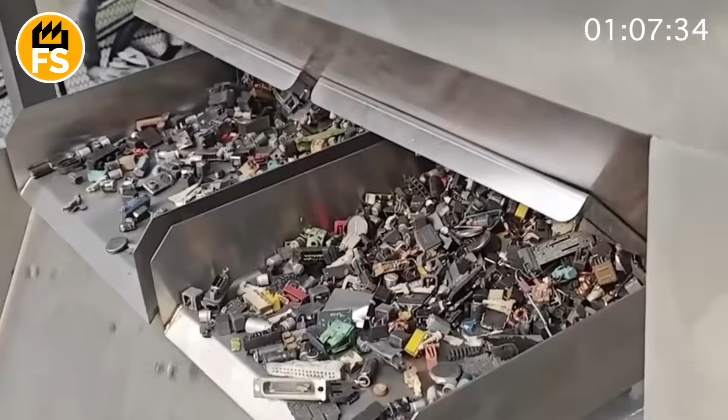But did you know that this trash is now not just a problem, but a goldmine for a new industry? In workshops where just yesterday, dirt and danger reigned, today high-tech hunters are at work. Robots that see more than the human eye and can sort in seconds what humans struggled with for years. And this is just the beginning. If you watch until the end, you'll find out how one teenager's idea changed the fate of the entire ocean.

The waste management sector is undergoing a technological revolution thanks to the implementation of artificial intelligence and robotics. At modern recycling plants, robotic manipulators, controlled by complex algorithms, sort waste with incredible speed and accuracy. Computer vision systems identify different types of materials, such as plastic, glass, paper, and metals, which significantly increases the recycling rate and reduces the amount of trash that ends up in landfills.

On a wide conveyor belt, a continuous, chaotic stream of what we've thrown away. Plastic bottles, crumpled cardboard boxes, aluminum cans, milk cartons, glass bottles. To the human eye, it's just trash, almost impossible to sort through. And for a human worker, it's hard, dirty, and dangerous work. And so, above this stream, like a relentless hunter, it hovers, the sorting robot.

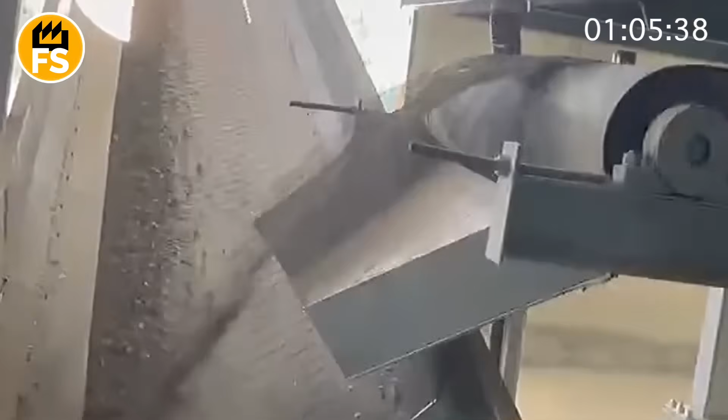This isn't a humanoid android from science fiction movies, but rather a high-tech industrial manipulator, similar to a giant steel arm mounted above the conveyor. But all its magic is inside. Its eyes are not just cameras. They are complex multispectral sensors that see the world differently than we do. They can distinguish materials by how they reflect light, analyze their chemical structure, and shape in a fraction of a second. The heart and brain of the system is artificial intelligence.

Before getting on the job, this AI underwent intensive training. It was shown millions of images of different types of waste, just like you would show a child a million photos of apples until they learned to recognize them flawlessly. In the same way, the robot learned to identify PET plastic, used for beverage bottles, HDPE, a denser plastic for canisters and bottles, paper, cardboard, various types of metals, and glass.

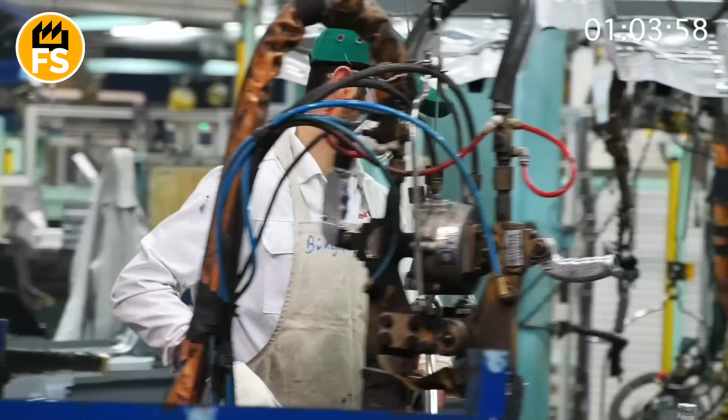And so the action begins. The conveyor is moving. The camera continuously scans the stream. The AI analyzes the images in real time. Target identified: aluminum can. It sends a signal, and the steel manipulator makes a lightning-fast, almost imperceptible move. A pneumatic suction cup, or a mechanical gripper, gently but firmly grabs the can, lifts it above the stream, and with a precise movement, drops it into the corresponding container on the side. Before the can has even landed, the robot's eye has already spotted a water bottle, and the arm flies to a new target.

Speed? A human can't compare. Some models can perform 100 manipulations per minute, that's more than 1 grab per second. Accuracy: the robot doesn't get tired, doesn't get distracted, and doesn't make mistakes due to inattention. Its sorting efficiency reaches over 95%, which significantly improves the quality of secondary raw materials. It can work around the clock, stopping only for maintenance. This isn't just a replacement for manual labor. It's a quantum leap that makes recycling much more efficient and economically viable, turning the problem of trash into a real resource for a new industry.

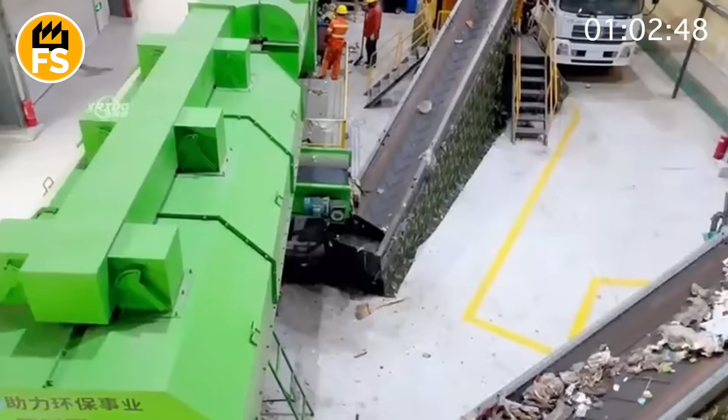The sorted materials, piles of hard plastic, bulky metal structures, wooden pallets, lie in separate mountains. They have been sorted, but are still too large, too awkward to be given a new life. This is where the true heavyweight of the recycling industry comes onto the scene, a machine whose job is controlled, brutal force. This is a rotary shredder.

Externally, it looks like a huge steel box, but its heart is a massive heavy rotor, studded with rows of extremely strong, hardened steel teeth or hammers. This is not just a machine. It's an insatiable beast, powered by a powerful motor that provides colossal torque. Its task is simple, but critically important: to shred.

When material is fed into its huge maw by a conveyor or a manipulator, be it an old car bumper or a whole pile of plastic barrels, a spectacle of unstoppable power begins. As it rotates, the rotor's teeth grab the objects, pull them inside, and with a deafening roar and grinding, tear them into pieces. There's no room for delicacy here. Hard plastic cracks, metal bends and tears, wood turns into splinters. This process is a demonstration of pure physical force, aimed at one goal: size reduction.

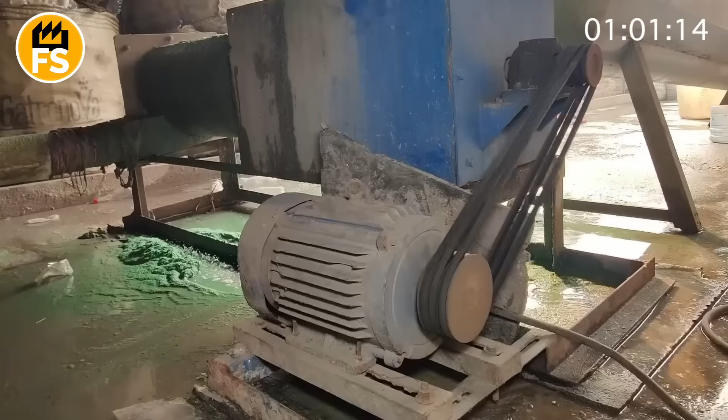But why this destruction? It's not senseless annihilation, but a key preparatory stage. First, the shredded materials become uniform in size, making them much more convenient for transportation and further processing. Second, it's a process of liberation. The shredder breaks down complex objects into simpler components, making it easier to separate different materials from each other in subsequent stages. And most importantly, it creates the ideal raw material for further recycling. A pile of small plastic pieces is much easier to melt in a granulator than whole bumpers.

Huge accumulations of plastic in the world's oceans, such as the Great Pacific Garbage Patch, are one of the most acute environmental problems of our time. By the way, do you believe that this patch doesn't exist? However, thanks to bold engineering solutions, there is hope for cleaning up the marine spaces.

The problem is so gigantic that it seems unsolvable. How can you clean up something the size of several countries? Most people just threw up their hands, but not Dutch teenager Boyan Slat. In his mind, a bold yet brilliantly simple idea was born, which grew into one of the most ambitious environmental projects of our time: the ocean cleanup.

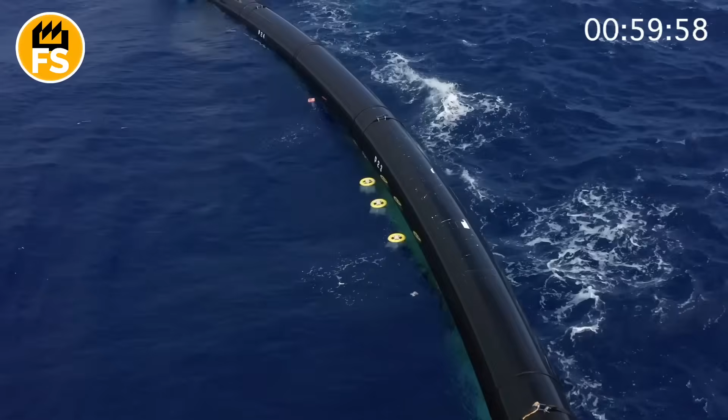The principle of the project is not to chase plastic all over the ocean, but to make the ocean itself deliver the garbage to a trap. For this, giant U-shaped barriers were created. This is not just a net, but a complex engineering structure consisting of a long, floating boom on the surface that prevents plastic from floating over it, and a deep mesh skirt underwater that traps the garbage, but allows marine life to swim freely underneath.

The most interesting thing is how this system moves. It has no engines. It passively drifts, carried by the same forces that move the plastic: wind, waves, and ocean currents. But thanks to its design and a large sail above the water, the system moves slightly faster than the plastic passively drifting in the water. This creates a small but constant difference in speed. The barrier, like a giant shepherd, slowly but relentlessly gathers its plastic flock inside its U-shaped arch.

The path to success was not easy. The first prototypes broke under the pressure of ocean storms, and unforeseen engineering problems arose. But after a series of trials, errors, and significant improvements, the system began to work effectively.

Now, from time to time, special support vessels approach the filled barrier and, like giant garbage trucks, unload the collected tons of plastic. This plastic, from old fishing nets to tiny fragments, is brought to shore, where it is sorted and sent for recycling, closing the loop. Thus, an idea born in the mind of a young dreamer has turned into a real, working technology that offers hope for cleaning our oceans.

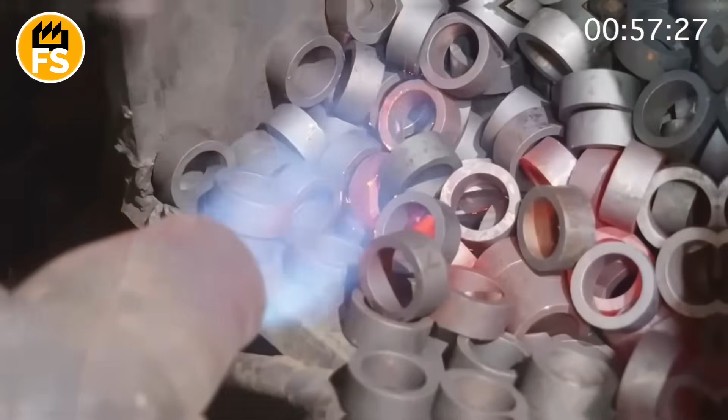Every minute in the United States, over 1,000 feet of copper pipe is manufactured. But behind this seemingly simple component lies large-scale production, explosive temperatures reaching 2,000 degrees Fahrenheit, and even espionage investigations. From molten lava in furnaces to laser marking under ultraviolet light, each pipe follows a journey straight out of a movie about industrial superheroes.

And did you know that some people are audacious enough to counterfeit copper just by painting its surface? This story is about how real pipes are made and how to distinguish the genuine article from a dangerous fake. Let's dive into a world where every second equals a ton of metal.

It all begins underground, in the copper mines of Arizona or Montana, where hundreds of thousands of tons of copper ore are extracted each year. It's crushed, washed, purified, and the output is shiny granules of pure copper. These granules go into smelting furnaces, where temperatures exceed 2,000 degrees Fahrenheit. Here, the copper transforms into molten lava.

The molten copper is poured into long molds, so-called slabs, or ingots. They resemble thick orange beams, glowing white hot. These ingots are destined to become pipes, but there's still a long way to go. Pure copper in the form of ingots or cathode plates is loaded onto railroad flat cars, trailers, or even ships, and transported to rolling mills or pipe manufacturing plants.

Cathode plates are thick metal sheets, approximately 3.3 feet by 3.3 feet, weighing up to several hundred pounds each. At the plant, the ingots or cathodes might first undergo additional remelting to achieve the required purity or desired shape, for instance, round billets for pipes. Then, they are heated and sent to the rolling mills.

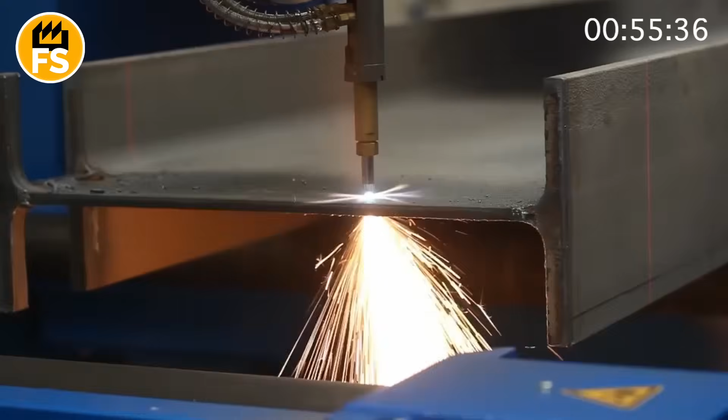Rolling lines operate with machines boasting over 10,000 horsepower. The ingots are sent to rolling stands, machines weighing tens of tons. Giant rollers crush the hot metal, transforming it into long strips. The sight is incredible: the red-hot copper stretches out, sparks fly everywhere, and nearby, streams of water cool the metal, turning it into a shiny, almost mirror-like sheet.

In modern workshops, all of this is controlled by computers. An operator sits in a glass cabin, similar to an airplane cockpit, monitoring dozens of screens. Here, every temperature, pressure, even the sheet thickness is under control. If anything goes wrong, the automation instantly stops the line.

Now for the most interesting part. The copper sheets are cut into blanks. In plants where the copper sheets are still hot after rolling, powerful hydraulic or mechanical shears are used for cutting. They look like giant guillotines with massive steel blades. The sheet moves along a conveyor. An automatic sensor determines the exact cutting spot. The blades descend with immense force and slice off pieces of the required length and width.

What do I mean when I say, with immense force? Sometimes it's tens of tons of pressure. All this happens in seconds, often while the sheet is still moving. That is, the line doesn't stop, and the guillotine cuts on the fly.

For certain formats or thinner sheets, rotary knives are used. These are rotating steel discs that cut the copper as the sheet moves. It looks a bit like cutting pizza, only on an industrial scale. This method is suitable for narrow strips, or when the sheet needs to be cut not only crosswise but also lengthwise.

In modern factories, laser or plasma cutters are used for complex shapes or high precision. A laser beam or plasma arc heats and vaporizes the copper at the point of contact. This results in a perfectly smooth cut, almost free of burrs. Lasers are used for non-standard parts or when special geometry is required.

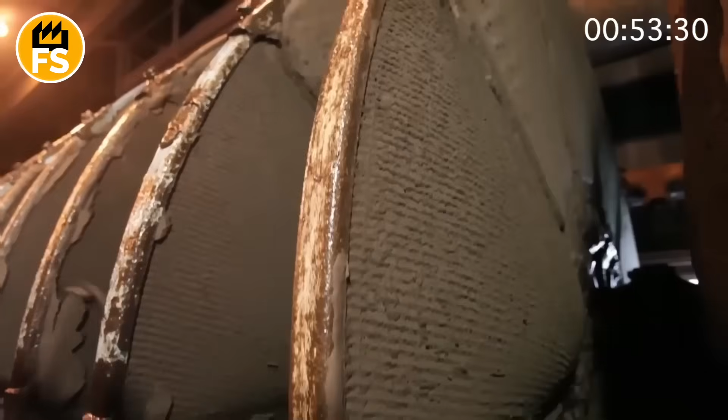After the main cutting, the blanks may pass through special edge trimming machines that remove irregularities, sharp edges, or excess material. The cut blanks are fed into drawing machines. This is a huge press that draws the copper through a steel die. The output is a perfectly round, smooth pipe. All this happens in mere seconds.

The machinery operates at incredible speed. At large plants, like Mueller Industries, they can produce over 1.5 million feet of pipe in a single shift. That's, no lie, like the distance from Chicago to Detroit.

Each pipe undergoes automatic inspection. Laser scanners search for microcracks and defects, and special robots select samples for additional testing.

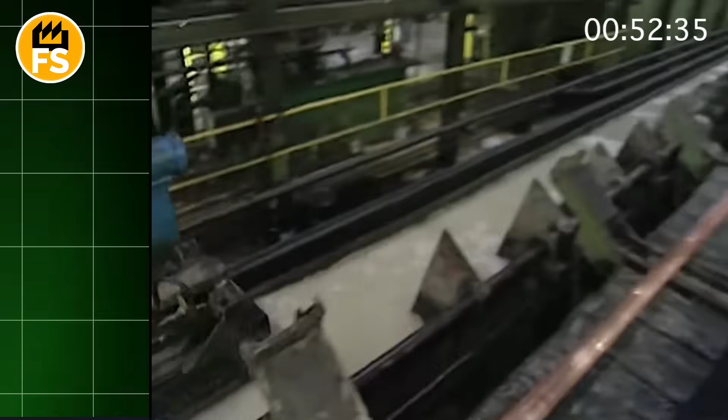After being drawn from the red-hot die, the copper pipe is still hot, flexible, and prone to deformation. To quickly give it stability, the pipes are automatically directed onto a conveyor, leading to special cooling pools. Inside is cold water, which creates clouds of steam upon contact with the incandescent metal. This sharp temperature drop locks the pipe's shape, preventing it from bending or losing its geometry. Cooling takes only a few tens of seconds, but is crucial for quality.

Next, the pipes arrive at the precision cutting table. Here, they are met by automated robots equipped with cutting discs or hydraulic knives. They measure the length with laser sensors and quickly cut the pipe according to the standard, for example 10, 20, or 40 feet, depending on the order. Cutting accuracy reaches tenths of a millimeter, and the speed is up to several hundred pipes per hour.

After this, the pipes undergo quality control. Laser scanners check the external appearance, looking for cracks, burrs, or other defects. Rejected pieces are automatically sent back for remelting.

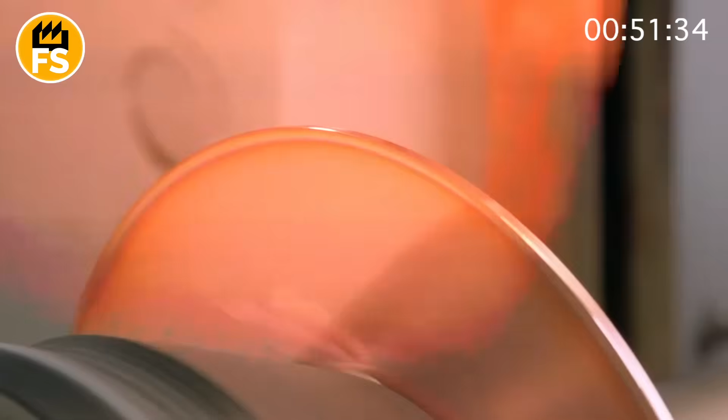Those that pass inspection continue along the conveyor to the marking machines. Here, a laser mark is applied to each pipe. It encodes the production date, batch number, sometimes even a QR code for tracking. This allows for precise identification of each pipe in case of claims or the need for quality analysis.

After marking, the pipes might still be slightly damp from the cooling water. To prevent corrosion and ensure a perfect appearance, they are moved into drying chambers. These are tunnels with powerful fans and heating elements. In just a few minutes, the moisture completely evaporates and the pipes acquire their characteristic copper sheen.

Next comes the packaging stage. Here, robotic manipulators come into play. They pick up the pipes using suction cups or grippers, very carefully stacking them into bundles of 10, 50, or 100 pieces, depending on the diameter and length. The robots work with surgical precision to avoid damaging the pipe surface and prevent deformation.

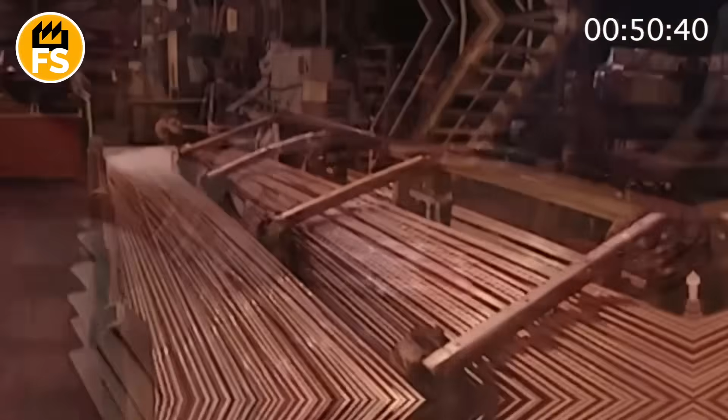After forming, the bundle is secured with metal or plastic straps for reliable fixation. Some plants add protective film or cardboard inserts to prevent scratches during transport.

The finished bundles are automatically moved to warehouse platforms. There, each batch receives a logistics label with all the data about the manufacturer, dimensions, production date, and final recipient. Then, loading onto trucks or railroad flat cars.

Everything happens as quickly as possible. A modern plant can prepare thousands of tons of pipe for shipment in a single day. Thanks to automation, this stage minimizes human involvement, ensures safety and accuracy, and guarantees that the pipes will arrive at the customer in impeccable condition.

Oh right, I promised to tell you about the spy games. This is a real detective approach in manufacturing. Due to the high price and constant demand for copper, temptation arose for unscrupulous manufacturers or intermediaries. They started counterfeiting markings and passing off cheaper alloys or even other metals as pure copper. Fraudsters became so brazen that they began forging documents and selling bootleg goods under the guise of reputable brands.

Counterfeits can be dangerous. They often fail under pressure or corrode faster. A rupture in such a pipe can cause accidents, flooding, or fires. Counterfeiting scandals have occurred in many countries when it was discovered that a copper pipe actually contained only a thin layer of copper, with cheap metal inside.

Manufacturers spent years building their reputations, and counterfeits under their name could lead to mass recalls and lawsuits. Therefore, pipes are now marked with invisible inks visible only under ultraviolet light. This helps combat counterfeiting.

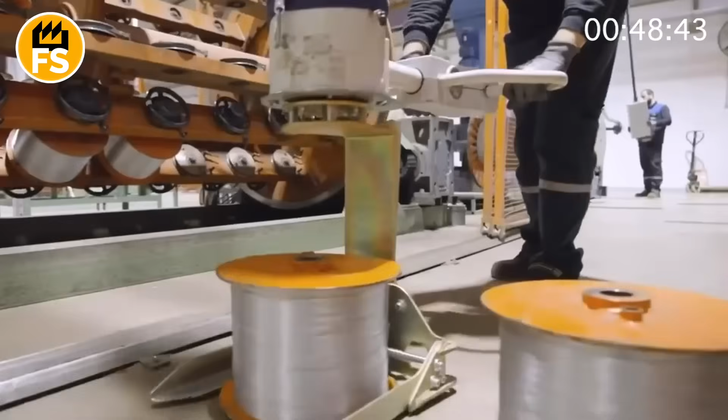Every year, the world produces over 200 million kilometers of cable, enough to wrap around the Earth 5,000 times. But few people know that the heart of every electric car is not just the battery, but also a cable that can withstand voltage, temperature, pressure, bends, and vibration. How are these high-tech wires created, capable of working in conditions where even metal seems alive?

How do scrap, dust, and molten aluminum turn into the arteries of Tesla, Rivian, and Lucid? In this video, the whole truth about the most engineered wire of the 21st century.

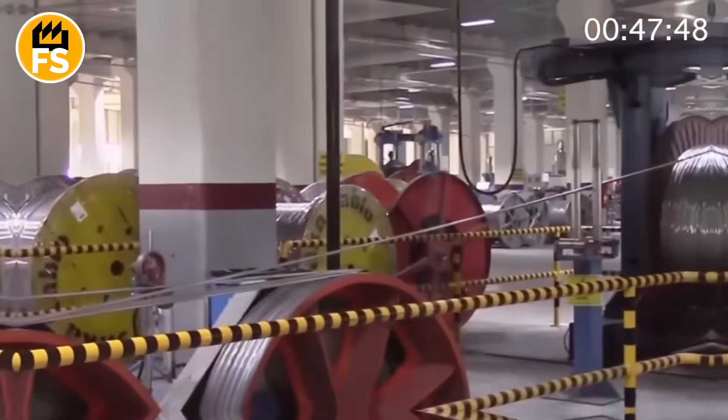Every cable for an electric car is a strategic choice. It must be flexible but not brittle, conductive but not vulnerable, lightweight but capable of withstanding hundreds of amps and thousands of hours of voltage. And when engineers sit down at the drawing board, they are like alchemists of the future, mixing formulas of elements in their heads, searching for the perfect balance.

Copper is the good old classic. It conducts electricity better than anything else, and it's its heart that beats in most cables. But the weight, oh, that weight! An electric car needs to be as light as a cat, so aluminum often steps in as a substitute. It's cheaper and lighter, though not as conductive. But in the right alloy, it's already a weapon of the electric age.

And around it, insulation. These are highly engineered polymers that can withstand heat, cold, chemicals, vibration, dust, and even a small lightning strike under the hood. They lack the shine or weight of metals, but without them, everything would turn into a sparkling inferno.

Some cables have shielding, a thin armor of copper braiding or aluminum foil. It protects signals from interference, because in an electric car, not only kilowatts are important, but every millivolt of data too.

Aluminum isn't born shiny. First, it's rough ingots, each weighing over 1,000 pounds. They arrive at the factory like aliens from their ore world, extracted from bauxite, purified, remelted, and finally formed into rectangular blocks resembling metal sarcophagi.

These ingots arrive in large trailers, carrying tens of thousands of pounds of the future. By appearance, they are just shiny silver blocks, neatly stacked on steel pallets. But just get closer, and you'll feel it. A warmth of energy emanates from them, encapsulated in atoms.

Sometimes, instead of ingots, the factory receives aluminum coils. This is already processed aluminum wire, wound into coils 3 or 4 feet in diameter, each weighing about 500 pounds. They shine like snake coils and glisten in the light, as if they just came out of a cybernetic beehive.

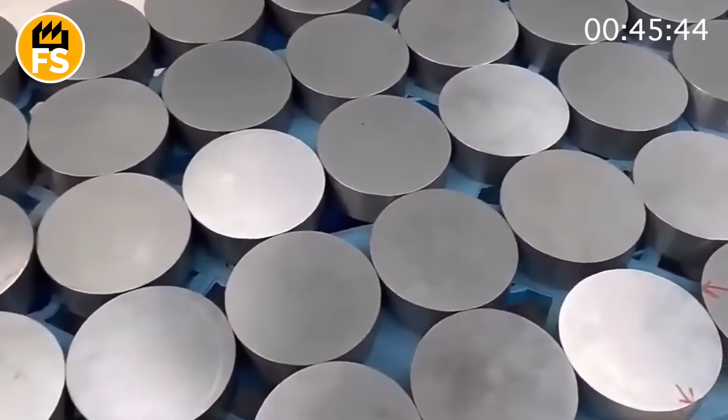Separate batches are supplied as aluminum scrap, meaning leftovers from other productions, cuttings, shavings, fragments of frames. They are sorted, cleaned, remelted, because in this future, not a single crumb of metal goes to waste.

As soon as aluminum enters the factory gates, it is identified, tested, and marked. In the first stage, technicians inspect the ingots or coils, checking for cracks, corrosion, impurities on the surface. It's like a quick checkup, by eye, by hand, with a scanner. If rust, oxidation spots, or transport damage are noticed, the metal is either sent for remelting or rejected.

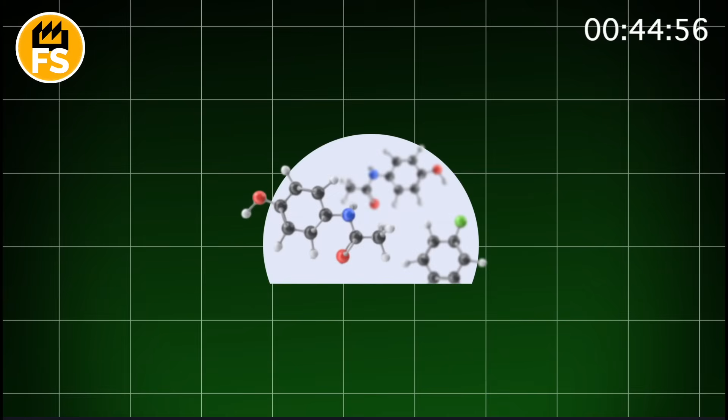Next, chemical expertise. A piece of each ingot is taken and checked on a spectrometer. This device shoots the metal with a laser, captures the reflected waves, and shows how much aluminum, iron, silicon, copper, magnesium, and other elements it contains. The goal is to make sure it's the right grade.

After passing the tests, the ingots are marked with a batch identification number, alloy grade, date and place of melting, and sometimes a QR code that leads to a full technical passport. It's like a birth certificate that will travel with the metal until the moment it becomes wire and ends up inside a Tesla, Rivian, or Lucid.

When the ingots have passed inspection and received their quality mark, they are loaded into giant electric or gas furnaces. The temperature inside, over 1,220 degrees Fahrenheit, is exactly what's needed to turn aluminum into liquid silver. No alchemy. We're talking about molten metal.

The damper opens, and massive cranes carefully lower the ingots into the red-hot interior. The metal slowly melts, releasing a gray vapor and a strange smell, a chemical mixture resembling heated foil and ozone. Nearby, operators in heat-resistant suits looking like astronauts carefully monitor the furnace indicators: temperature, impurity level, viscosity.

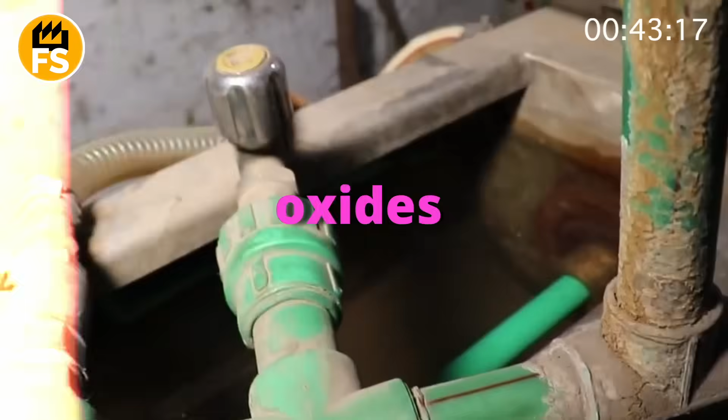No mistakes are allowed here, as the cable for an electric car must withstand thousands of miles and hundreds of charges. A slag layer appears on the surface of the molten metal: impurities, oxides, residues of alkaline metals. It is removed manually, or by automatic systems to leave only a clean, homogeneous mass. Sometimes, modifiers or alloying elements are added to give the metal the desired properties: more conductivity, strength, flexibility.

Molten aluminum is poured into casting molds, usually round blanks 4 to 6 inches in diameter and up to 10 feet long. These are the future rods from which cables will be drawn. The process is called casting billets. Cooling is controlled in stages to avoid cracks. All this is accompanied by hissing steam, the roar of pumps, and a rhythmic thud, the heartbeat of the cable factory.

So what is drawing? It's a process where aluminum rods are pulled through a series of increasingly narrow holes. With each pass, the metal becomes thinner, longer, and stronger. Like a piece of dough being rolled out into noodles, only instead of dough, it's hot aluminum, and instead of a rolling pin, hydraulic machines weighing tens of tons.

Before drawing, the blank is heated to an optimal temperature, no more than 650 degrees Fahrenheit, so it becomes plastic but doesn't melt. Then it's fed into a drawing machine, where the magical transformation begins.

Each pass through the die reduces the wire's diameter by a few percent. It's like passing through increasingly tight doors, forcing the material to stretch. After a dozen such passes, a thick rod half an inch in diameter becomes a slender strand 0.1 inch thick or even less. During drawing, the wire heats up from friction, so it's constantly cooled with water or special lubricants.

Without this, it would overheat, lose its shape, or even break. Lubrication also reduces wear on the tools, dies made of carbide or diamond. Some machines can draw wire at speeds over 2,000 feet per minute. It's like someone pulling a spider web from a ball of lightning.

Engineers carefully monitor the tension, temperature, shape, and shine of the wire, because even the smallest crack or geometry violation is a future short circuit in a $60,000 car.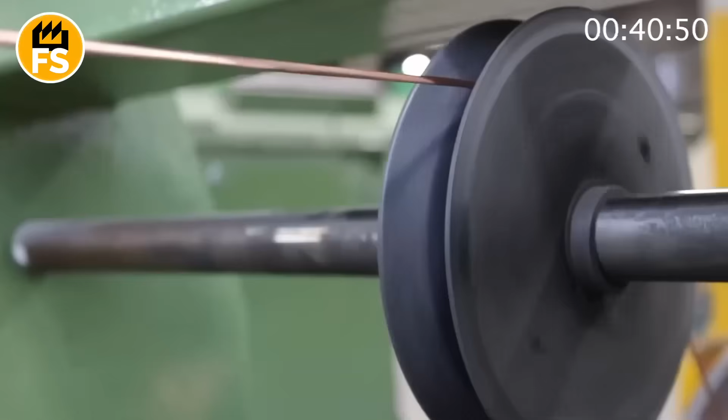When the drawing is complete, the cable thread already looks like a shining string for a future electro-magical harp. It's long, thin, conductive, but still stubborn. To be able to wrap around batteries, penetrate narrow body channels, and withstand hundreds of thousands of bends in the motion of an electric car, it needs to be annealed.

The wire slowly passes through furnaces without an open flame, or through an induction field that heats it from the inside. The temperature, around 600 degrees Fahrenheit. This is the point where the metal doesn't melt, but changes its character.

The atoms, which until now held onto their nodes in a stressed crystal lattice, finally relax. Like soldiers after a battle, like a string that has sounded at its maximum, and finally fallen silent. The metal structure becomes more uniform, the grains larger, and the wire itself flexible, elastic, calm.

The surface of the wire after heat treatment is darkish, with scale or signs of oxidation. It is cleaned off with abrasive brushes or in chemical baths. Aluminum must shine, like a star before a rocket launch. The cleaner the surface, the better the insulation will adhere.

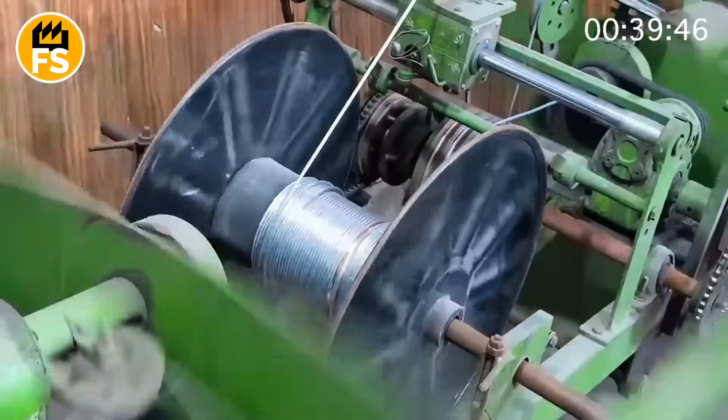Next, insulation. An ultra-thin layer of material is applied to the wire, separating it from everything except the current. This can be polyethylene, Teflon, silicone, or enamel, depending on the cable's intended purpose. The material is applied in liquid form, often in heated baths or through nozzles that cover the wire with a uniform flow. The application temperature, over 400 degrees Fahrenheit.

As soon as it's applied, it's immediately baked. The insulation doesn't dry, it polymerizes. It's like creating a skin around the nervous system. It must be perfectly even, dense, without microcracks. Otherwise, the wire won't pass the test.

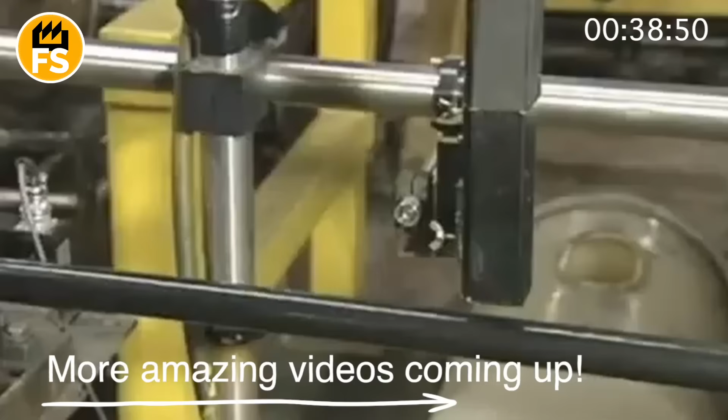Next, the wire passes through detectors that check it for breakdown, coating thickness, and electrical resistance. At least once every 1,000 feet, samples are taken manually and checked under a microscope. Everything is recorded because this wire will later work in high-voltage systems.

The finished wire is cooled, lubricated to reduce friction, and then carefully wound onto drums or spools, sometimes up to 5,000 feet long. This is no longer just metal. It's the nerve of an electric car, ready to hit the road.

Did you know that each year the world builds structures so massive, skyscrapers scraping the sky, bridges spanning vast canyons, ships larger than city blocks, that they require metal parts shaped with forces equivalent to thousands of tons and precision measured in mere millimeters? This isn't just cutting and welding metal in a workshop. This is bending steel plates thicker than your arm, forging colossal parts under unimaginable pressure, and machining giant structures with surgical accuracy. Get ready to witness the most impressive, largest-scale metal fabrication methods on Earth, uncovering the hidden power and precision that builds our modern world.

The sheer scale of metal fabrication hits you right away on the factory floor. We're talking about moving and shaping pieces that weigh tons. One of the most fundamental and visually impressive processes is metal bending. Forget bending a paperclip. Imagine bending steel beams strong enough to support a building, or curving thick metal plates for ships and pressure vessels.

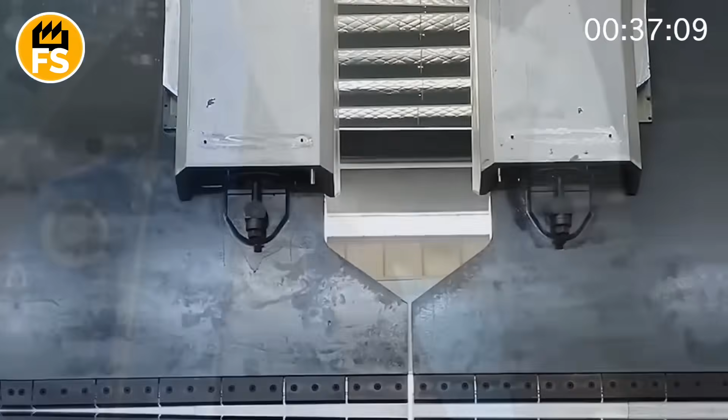Massive machines called press brakes or roll benders use incredible hydraulic force to shape metal. Picture a giant press pushing down with thousands of tons of pressure to put a precise bend in a steel beam, or colossal rollers curving a thick steel plate into a perfect cylinder. These aren't just big tools. They're feats of engineering designed to apply immense force with fine control.

On the biggest scale, you see specialized machines like the FKB 3-roll plate bending machine, capable of shaping massive steel plates for tanks, wind turbines, or ship hulls with incredible accuracy. Software like Bentronic controls the rollers with millimeter precision, even on pieces the size of a room.

Another impressive example is bending giant steel beams for structures. Machines like the Faccin RCMI use powerful hydraulic rolls and guide systems to curve huge I-beams or H-beams into exact shapes needed for complex architecture or bridges. Applying that much force while maintaining the beam's structural integrity is a true industrial art form, making metal flow like clay, but under thousands of tons of pressure.

Another mind-blowing method is metal forging. This is using localized compressive forces, often with immense power and heat, to shape metal. Think of a blacksmith, but on a scale where the hammer is a machine delivering thousands of tons of force. In massive forging presses, heated metal billets, solid blocks of steel, are pounded or squeezed into complex shapes. This process changes the metal's grain structure, making the finished part incredibly strong and durable. This is how critical components for aircraft landing gear, engine parts, or even massive artillery barrels are made.

At places like the Watervliet Arsenal, you see iconic machines like the rotary forge. This is a different kind of forging, using rotating dies to hammer and shape a heated steel billet into a hollow tube, like a cannon barrel, with incredible speed and precision. These machines have been operating for decades, playing a vital role in producing thousands of heavy-duty barrels for military systems. The sheer force and rhythmic pounding of these colossal machines working on red-hot metal is one of the most dramatic spectacles in metal fabrication, showcasing raw power precisely controlled.

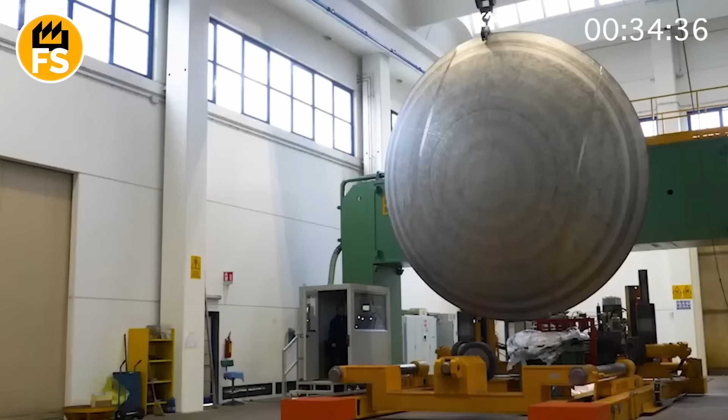Once metal parts are formed by bending or forging, they often need precision finishing. This is where machining comes in, using tools to cut away material and achieve exact dimensions and shapes. On the biggest scale, this involves massive CNC, computer numerical control, machining centers working on parts that weigh many tons. Imagine a machine tool the size of a small house, precisely cutting, drilling, or milling a giant metal casting or forging with micron-level accuracy. Sophisticated software controls these machines, making complex cuts and achieving tolerances required for critical components in aerospace, heavy machinery, or energy production.

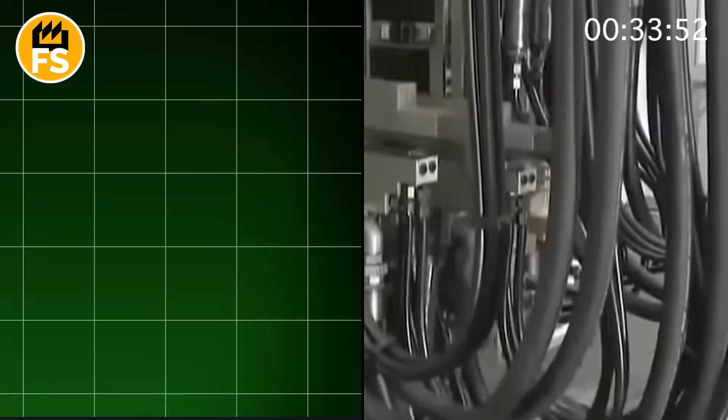Precision machining isn't just about size, it's about achieving incredible accuracy on massive objects. Machines use advanced cutting tools made of hardened materials, sometimes cooled with high-pressure coolant, to cut through tough alloys. On critical components like gearbox housings, turbine shafts, or large crane parts, surfaces must be machined to tolerances that ensure perfect fit and smooth operation under immense loads for decades. It's a process where technology allows engineers to sculpt giants with the precision of a jeweler.

Beyond these core methods, metal fabrication involves a host of other impressive processes on industrial lines. Cutting is a crucial first step, using powerful lasers, plasma torches, or water jets to slice through thick metal plates with incredible speed and clean edges. Welding is joining metal pieces together, from automated robotic welding arms building vehicle frames or ship sections, to skilled human welders performing critical structural welds that must withstand massive forces. Surface treatment like sandblasting and industrial painting or coating lines protect the metal from corrosion and give it its final look.

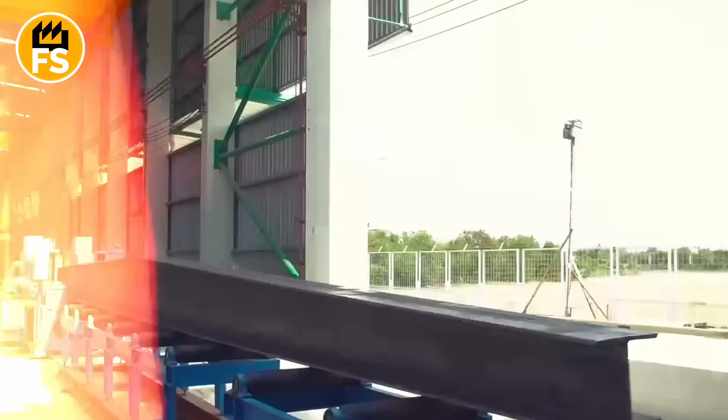Throughout all these stages, from the arrival of raw metal plates and beams to the final finished and assembled components, rigorous quality control is paramount. Industrial scanners, ultrasonic testing, X-rays, and precise measurement systems check every weld, every dimension, every material property. Experienced technicians and engineers oversee automated inspection systems and perform manual checks on critical points. A blend of high-tech monitoring and human expertise ensures these massive metal parts meet the highest standards of strength, precision, and safety required to build skyscrapers, planes, and infrastructure.

These massive metal fabrication facilities are not just factories. They are cathedrals of engineering power and precision. They process hundreds of thousands of tons of metal each year, shaping it into the backbone of our cities, transportation, and industries. It's a testament to human ingenuity and technological advancement, taking raw materials and applying immense force and incredible accuracy to build the physical world around us. It's a hidden, necessary industry that few people ever see.

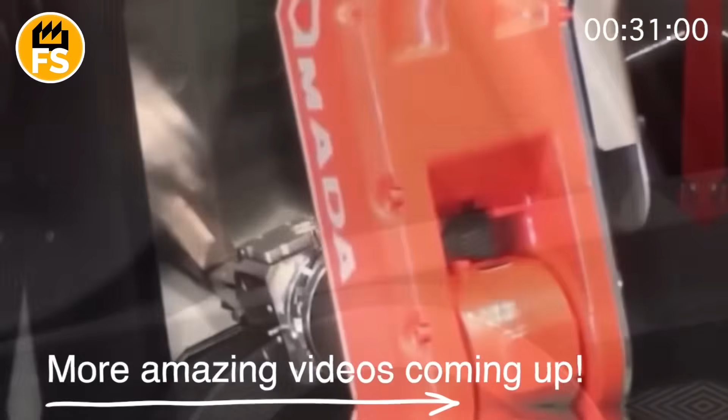So, the next time you look up at a skyscraper, cross a bridge, or see a large machine at work, remember the mind-blowing industrial process that created its metal bones. The bending of giant beams, the forging of colossal parts, the precision machining of massive structures. It's all part of the amazing world of metal fabrication. It's a fascinating look into the power and precision that builds our modern world.

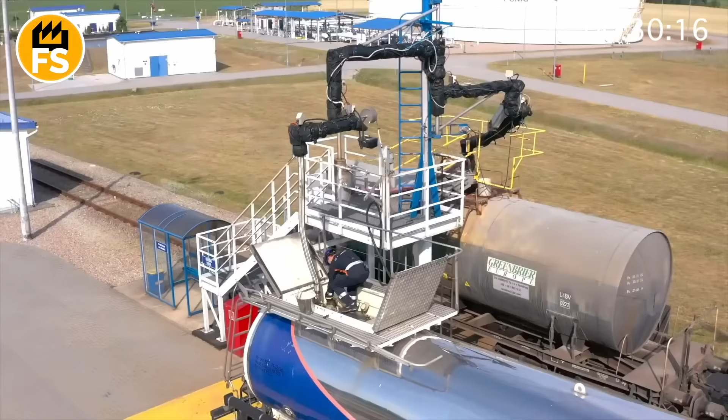Today, we're gonna dive deep into the seriously fascinating world of oil production. We'll start with how it even forms over millions of years, then check out the incredible tech in modern wells that punch down tens of thousands of feet into the earth. We'll cover everything from those giant platforms way out in the middle of the ocean to the complex refining steps that take that raw material and turn it into clean fuel. Ready to find out the real story behind that black gold? Let's just jump in and see how it really works.

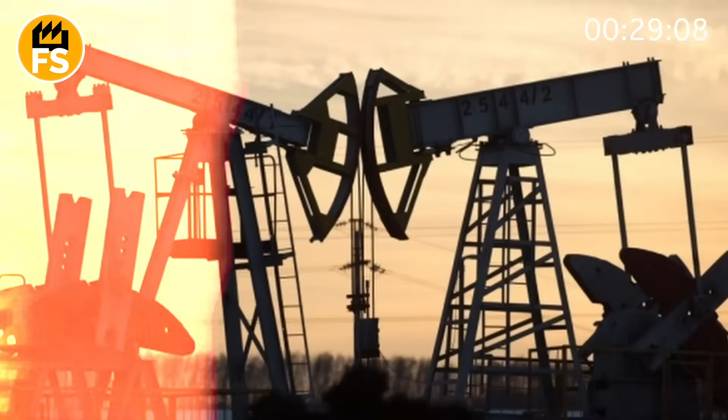Folks are projecting that average oil production in the United States next year is going to hit right around 9,900,000 barrels per day. But honestly, do you even know what oil is or where it came from in the first place? Everybody talks about oil this, oil that, oil spills, oil production, but nobody ever really tells you what it actually is. Well, stick with us and we'll break it down for you.

The way oil forms is a seriously long-term project, taking millions of years. It kicks off with organic stuff, like the leftovers from ancient plants and little critters, piling up on the bottom of old seas and lakes. Over time, these plant and animal remains get buried under layers of sedimentary rocks, things like clay and sand. Then, under a ton of pressure and heat, which gets way more intense the deeper you go, that organic material starts transforming into something called kerogen, a kind of solid, waxy material. If the temperature keeps cranking up, hitting somewhere between 140 and 302 degrees Fahrenheit, that kerogen breaks down using heat, and you end up with liquid hydrocarbons. So, yeah, that's your oil.

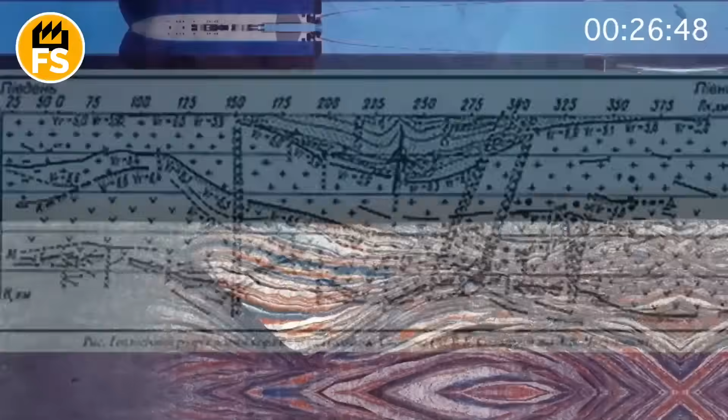Seismic surveying is actually pretty spectacular to witness. They set off controlled underground explosions in a specific area, or use special vibrating platforms to create waves that travel down through the rock layers. These waves bounce off different layers in the ground and come back up, and sensors pick them up. It's like building a three-dimensional picture of what's underground, essentially letting them see beneath the surface.

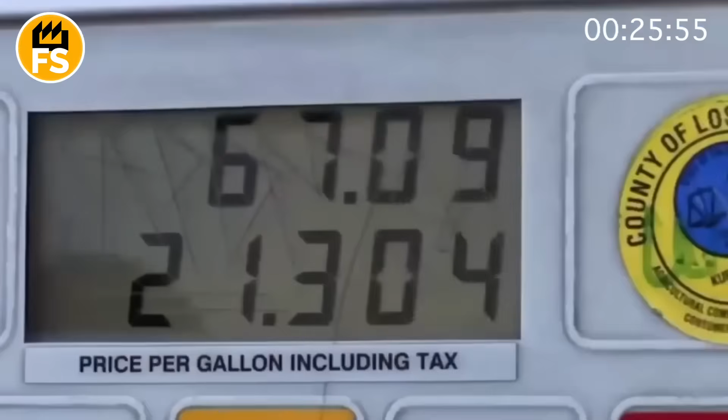Once the geologists pinpoint a promising spot, the actual drilling kicks off. A rig, whether it's sitting on land or floating out in the ocean, turns into this giant humming machine that runs non-stop 24/7. The drill string, those are steel pipes with a cutting bit on the end, bores into the earth, spinning at up to 200 rotations per minute. To keep the drill bit cool, carry rock pieces out, and stop the hole from collapsing, they pump in drilling mud. That's a thick mixture, usually water or oil-based.

Modern wells can go seriously deep, ranging from 10,000 feet down to 16,000 feet. And sometimes, way deeper, up to 35,000 or even 40,000 feet. For instance, over in places like Texas or Saudi Arabia, they're drilling wells that stretch over 26,000 feet long. And often, a big section of the well goes sideways, horizontally. This lets them tap into a much bigger chunk of the oil reservoir without having to drill a bunch more vertical wells.

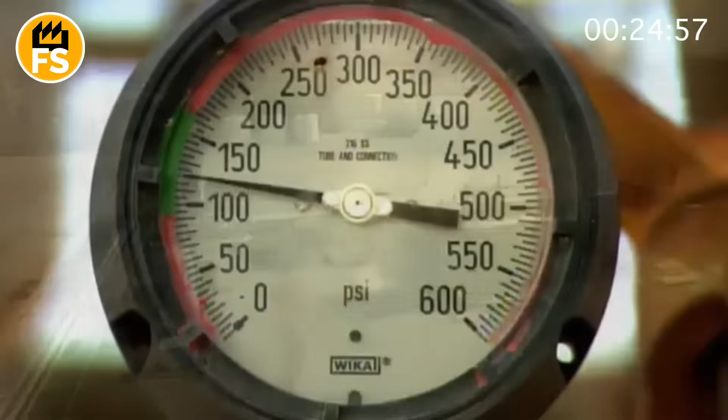One of these operations can cost you anywhere from a few million dollars to easily tens of millions of dollars. And honestly, it doesn't always work out successfully. But if the well does turn out to be a producer, oil starts making its way to the surface, either pushed by its own natural pressure or pulled up with pumps. And that's when the next big stage begins, actually getting the oil out, processing it, and shipping it off.

Speaking of major producers, Saudi Arabia is right up there as one of the biggest oil producers globally. Just back in February, Saudi Arabia was pumping out nearly 9 million barrels of oil every single day. This country actually has a solid chance to boost its standing in the energy market even further, especially since Saudi Aramco recently announced they found 14 brand new oil and gas fields right there in the country.

So, once all the exploration and well drilling is completely finished, the absolutely crucial stage begins, actually pulling that oil out of the ground.

If the field is really rich, the oil itself might just start pushing its way up to the surface simply from its own pressure. That's what's traditionally called a gusher. And while it might look pretty dramatic, with those big streams of black liquid shooting up into the air, these days, that method is seen as pretty old school and kind of dangerous. Modern wells are outfitted with sophisticated systems of valves and regulators that allow them to precisely control the pressure and the volume of oil that's flowing out.

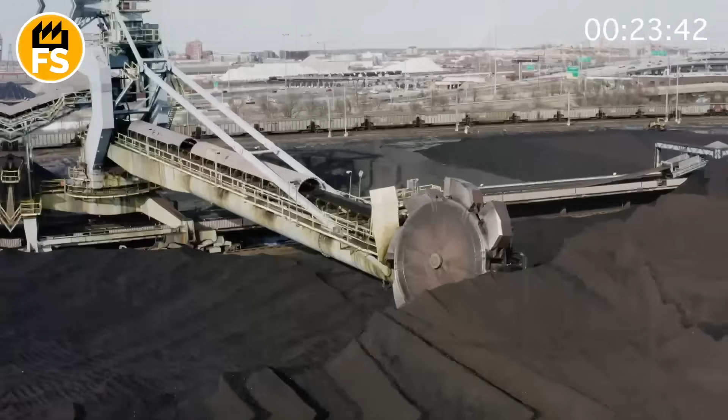The oil gets to the surface through a network of pipes, and then it heads over to what's known as a processing facility. That's where they separate it from other stuff that came up with it, like associated gas, water, sand, and whatever else is mixed in. This step often happens right there at the extraction site, either on those big platforms out in the ocean or at bases on land. Separating all those impurities is a pretty cool process to watch.

The oil mixed with all the extra stuff goes into this large, sealed tank, and gravity gets to work inside. Gas is light, so it floats up to the top. They collect it through an upper outlet. Water is heavy, so it settles down to the bottom. They drain it off through a lower valve. Oil is in the middle in terms of density, so it hangs out between those two layers.

Now, if tiny droplets of water get kind of stuck in the oil, it's not quite as simple to separate them out. That's when they might add something called demulsifiers. These are chemicals that break up that mixture. Or they might heat the oil up a bit, which also helps those different layers split apart. But hey, let's get back to the extraction itself.

Sometimes, to increase the pressure down in the rock formation, they use secondary recovery methods. For instance, they might pump water, gas, or even steam into other wells. This helps push the oil towards the well they're actually producing from. Technologies like this can help them pull out up to 60% of the oil reserves from a field, whereas without them, that number could be cut in half.

The average amount of oil a modern well in the United States produces is anywhere from 500 to 1,500 barrels per day. Just think about that for a second. One barrel is 42 gallons. Now multiply that by the thousands of wells operating all over the planet, and that really gives you a sense of the true scale of oil extraction.

Oil by itself is actually a really complex blend of hundreds of different hydrocarbons, ranging from lighter gases all the way up to heavy fuel oils. To get gasoline out of it, that's the light, easily ignitable part that internal combustion engines can use effectively. The raw material goes through several technically tricky stages at an oil refinery.

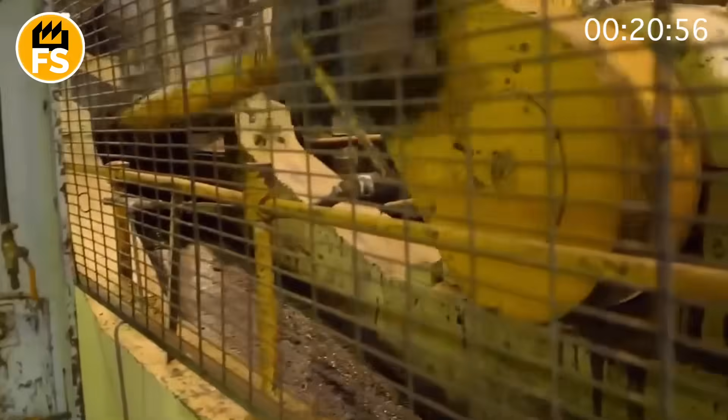It all kicks off with something called fractional distillation. Crude oil is first heated up to temperatures between 660 and 750 degrees Fahrenheit and then fed into a distillation column. This is a tall tower where the temperature gets cooler as you go up. Different components of the oil vaporize and rise to different heights, where they cool down, turn back into liquid, and are collected at various points.

The gasoline part, one of the lighter ones, is typically collected at levels corresponding to temperatures between 104 and 392 degrees Fahrenheit. But simply distilling the crude oil isn't quite enough to get high-quality gasoline. You only get about 15 or 20% of the gasoline fraction this way, and most of what comes out still has stuff you don't want in it, and an octane number that's just too low.

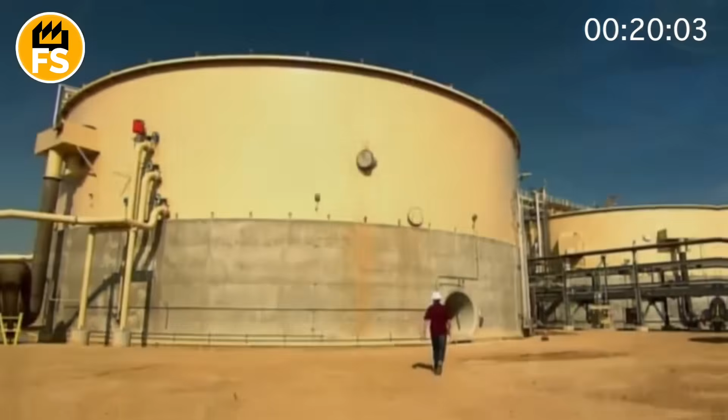To boost the total amount of gasoline they get, they use a process called cracking. This is basically all about breaking down those long hydrocarbon molecules into shorter ones. The most common way is catalytic cracking, where heavier parts are heated up to almost 1,000 degrees Fahrenheit in the presence of catalysts. This lets them get extra gasoline from those heavier leftovers. Sometimes they also use hydrocracking, which involves hydrogen under high pressure.

When it's all said and done, the percentage of gasoline you can get from just one ton of oil can reach 40 or 50%. That depends, of course, on the type of oil and how sophisticated the refinery is. The gasoline they get from these cracking steps usually has a low octane number, meaning it would cause knocking or detonate too early in an engine.

To fix this, they put it through a process called reforming. This means rearranging the structure of the molecules at high temperatures, usually with platinum catalysts present. This really boosts the octane number, potentially all the way up to 98, making the fuel perfectly suitable for today's cars.

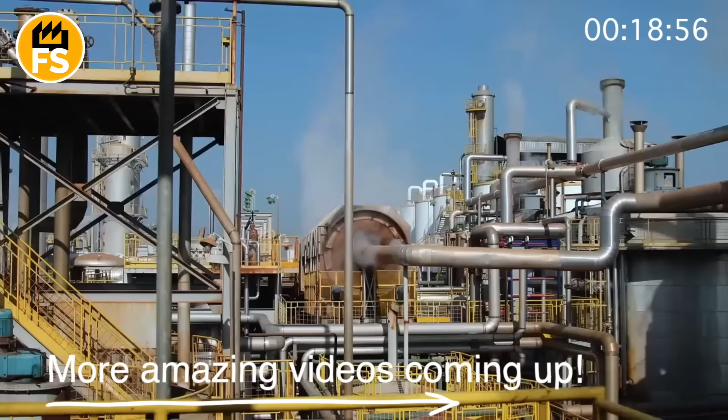In the very last step, they mix additives into the gasoline to improve how it works. This includes things for anti-corrosion, preventing engine knocking, cleaning the engine, and reducing environmental impact. This helps keep the engine healthy, cuts down on harmful stuff coming out of the tailpipe, and makes the fuel more efficient overall. Just one modern oil refinery can process up to 400,000 barrels of oil every single day.

That's pretty impressive, especially when you stop and think that daily gasoline consumption in the United States is roughly 370 million gallons. Besides going to our homes, natural gas also gets sent to power plants, factories, and chemical facilities. For big industrial users, they need way higher pressure and volume. They're using pipes with diameters up to 48 inches and pressures up to 1,500 psi.

Gas can even be turned into a liquid. They cool it way down and ship it in massive tankers across the oceans.

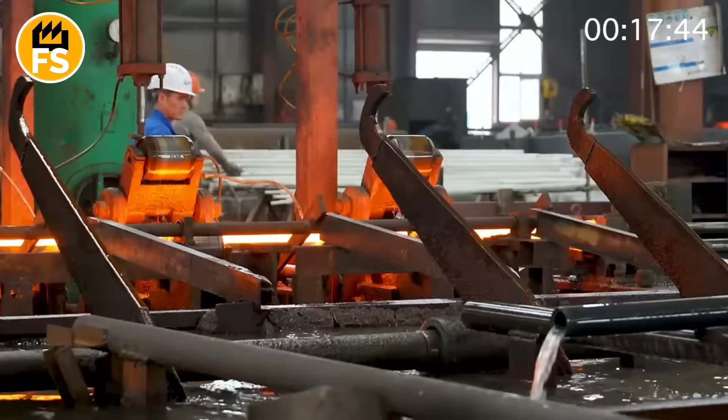Imagine this: red-hot metal, up to 33 feet long, being pushed with a dull roar into a massive rolling mill. No seams, no joints. Just a perfectly smooth steel pipe appearing literally out of nowhere. These aren't scenes from a science fiction movie, but the daily work at one of the most unique factories in the world. How is it possible to create a pipe without a single seam? One that withstands pressure of hundreds of atmospheres and operates where other materials simply melt. Ready to walk through the scorching workshop and find out how true engineering perfection is born? Then let's embark on a journey to an amazing steel pipe factory. It all starts with cylindrical billets.

Defects shall not pass.

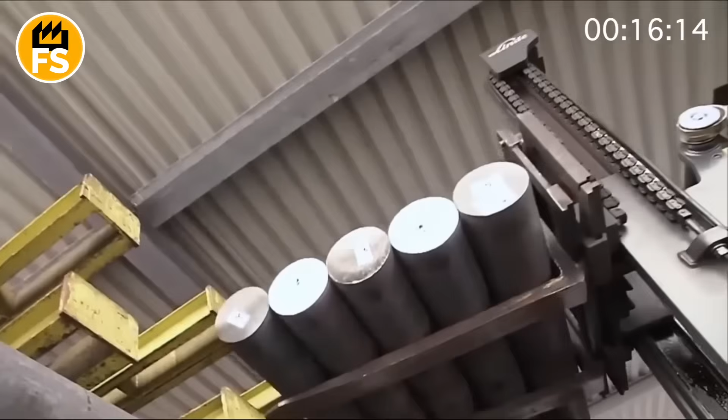First, the billets get an X-ray. Well, not exactly X-ray, but something similar for metal: ultrasonic testing. The billet is coated with a conductive gel, like for a human ultrasound, and a transducer is moved across it. Special transducer ears shoot sound waves at a frequency of 5 MHz, that's 100 times higher than submarine sonar. This is how they search for cracks and inclusions of foreign materials within the billets. The system builds a 3D map of defects with an accuracy of 1/100th of an inch. If it finds a saboteur, the billet is marked with red paint and sent to metal hell for remelting.

Next comes the chemical analysis. For this, 5 or 10 metal samples are taken from each batch and sent to the factory laboratory. There, they use special spectrometers, devices that read the metal's composition using light emissions. The spectrometer determines over 12 elements in the composition in seconds. During the analysis, the sample is treated with an electric spark or a laser. This excites the atoms on the metal surface, causing them to emit light of different wavelengths. Each chemical element glows uniquely, so the device recognizes exactly which elements are present in the steel and in what quantities: how much carbon, manganese, chromium, nickel, or phosphorus.

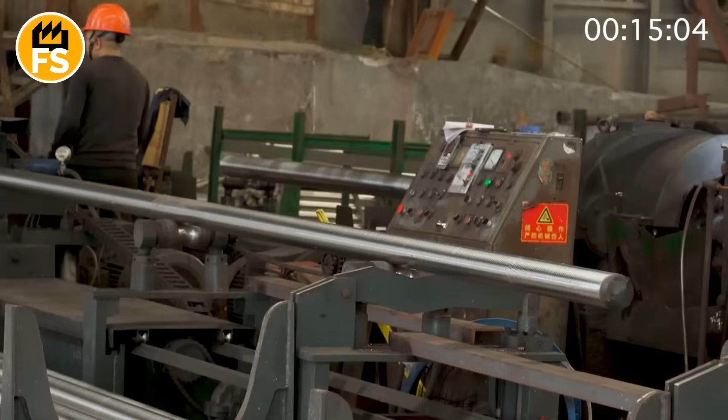This analysis takes only a few minutes, but provides a complete picture of how well the billet meets technical requirements. If the composition isn't perfect, the batch might be rejected or redirected to other production lines. From 1 to 3% of billets are sent for remelting. Defective billets are sent to an electric furnace with a temperature of 2,900 degrees Fahrenheit, where the steel becomes liquid again. All the post-melting slag is used for road construction.

90% of defects are detected during the ultrasonic diagnostic stage. It's like finding a needle in a haystack in 10 seconds. The chemical analysis takes 17 seconds, faster than you order coffee at Starbucks. Quality control costs range from $50 to $100 per ton of steel, but it's better to overpay than to later have a well blowout due to low quality material. Quality control is the Karen's filter for steel. Only 97 to 99% of billets become pipes. The rest are sent for reincarnation. So, when you hold coffee in a steel thermos, know this: its ancestors went through real metal special forces training.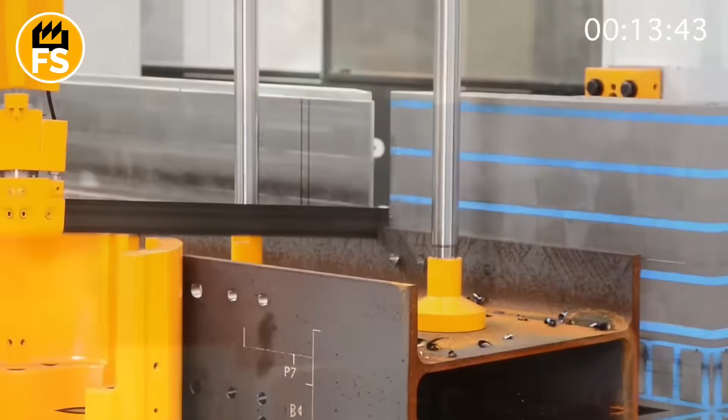After checking the chemical composition, the cylindrical steel billets are delivered to the heating section, the place where a giant furnace stands. These furnaces are true giants, capable of holding over 1,000 billets simultaneously. To load the billets inside, massive automated cranes or special manipulators with heat shields are used. The billet is picked up using gripping mechanisms, large metal fingers or tongs that securely hold the heavy part. The crane carefully moves the billet to the open loading door of the furnace. At this time, the temperature inside can exceed 2,400 degrees Fahrenheit, so the entire process is maximally mechanized.

People operate the machinery remotely from a safe cabin or control panel. The furnace has special guides or pushers that help place the billets carefully inside, so that heat distributes evenly. After loading, the furnace doors are hermetically sealed, and gradual heating to the working temperature begins. In 2 hours, the steel transforms into a plastic mass. The billet becomes ready for forming, like melted chocolate.

Next, the monster drill comes into play. It weighs 12 tons, that's like 2 elephants. The red-hot steel billets, massive cylinders, are removed from the furnace and delivered to a special rolling machine, where one of the most crucial stages of seamless pipe production begins: creating the hole inside.

The piercing process looks impressive. The red-hot billet is placed on a special support ring in front of the piercing mill, where a thick, cone-shaped rod awaits it, the so-called piercer point or piercing mandrel. At this moment, immense force is at work. The billet is rotated between two conical rolls, spinning in opposite directions. The rolls don't just squeeze the billet, they create strong rotational and axial pressure, causing the billet to stretch along its axis, flowing around the piercer point.

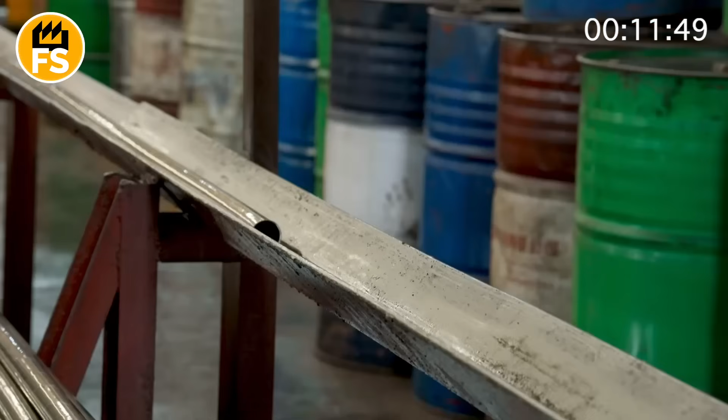To avoid cracks or ruptures, the pressure and temperature during piercing are controlled very carefully. If the billet cools too quickly, or the pressure is distributed unevenly, it can break or lose the required shape. Therefore, the process runs without interruption, with strict adherence to all parameters.

This process is called the Mannesmann method, named after the German engineers who invented it in 1885. After the initial piercing, the resulting rough pipe is called a hollow shell or bloom. The wall thickness of the shell is approximately 2 inches.

It still has uneven walls and may contain small defects, so the next stage is rolling and calibration, where the pipe is stretched, straightened, and brought to the required dimensions and wall thickness. The red-hot steel billet enters under giant rolls 5 feet in diameter. Under tremendous pressure, it's drawn out into a slender pipe up to 40 feet long, faster than you can blink.

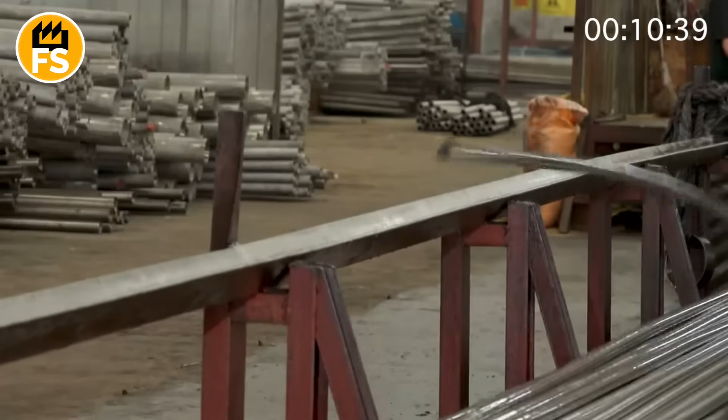This is where the major league of precision reigns. Wall thickness is reduced, with a deviation of less than 4/1000ths of an inch. That's thinner than a human hair. And all this happens at staggering speeds of 16 to 49 feet per second, faster than Usain Bolt on his best day. It's like rolling out the thinnest pizza dough, only instead of dough, it's a red-hot steel core, and instead of a kitchen board, there's a shower of sparks and the roar of the rolls.

Next, fire gives way to ice. Well, not ice, but cooling. The workshop heat is 122 degrees Fahrenheit, so workers wear special suits as if preparing to conquer Mars. Meanwhile, the pipes gradually cool in the open air, their temperature slowly dropping to 570 degrees Fahrenheit to avoid deformation and cracking.

When the pipe emerges from the fiery dance of rolling, it resembles an enraged dragon, powerful but bent into wild spirals. That's when the 8-roll giant enters the scene, a mechanical Hephaestus that will forge perfect forms. Its rolls, stronger than the rocks of Olympus, bend the steel with a force of 500 tons, like putting 250 Land Rovers on the pipe. But this force isn't a destroyer, it's a surgeon. It corrects curvatures smaller than the thickness of a hair.

And then comes the time for lasers. They scan every millimeter, finding the smallest defects, invisible cracks, minor unevenness. And when they find something, plasma scalpels enter the game, 10 times hotter than lava, cutting the metal like cosmic lightning bolts. All that remains of the defects is smoke and legend. If the Colossus of Rhodes were made of such pipes, it would still be standing today.

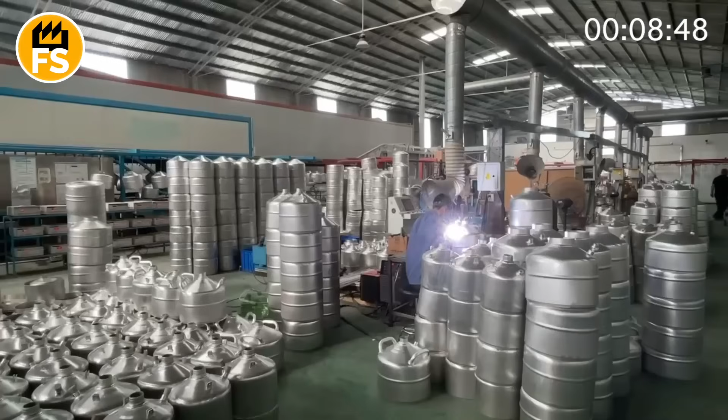Imagine taking the air you are breathing right now and turning it into a substance that can freeze ice cream in 3 seconds and make a banana tough enough to hammer nails. This is not magic, it is liquid nitrogen. Every second, it is used in medicine, science, the food industry, and in some top-secret experiments. Temperature: minus 321 degrees Fahrenheit. One sip, and you lose part of your stomach. One breath, and you unlock tomorrow's technology.

How does the coldest substance on Earth get made from regular air? How is it transported, stored, and used? And why can it save or destroy? Watch closely and prepare to be amazed.

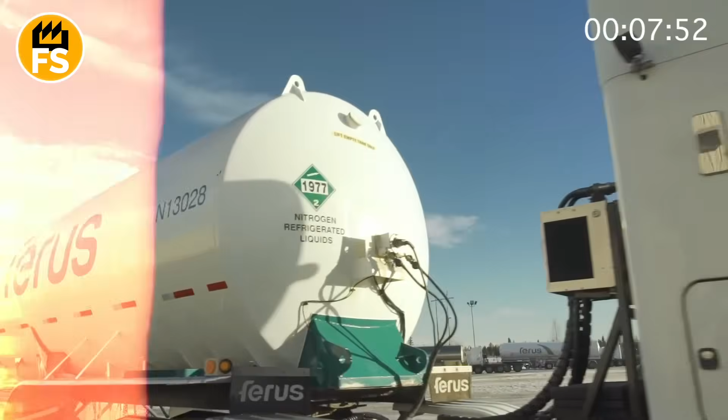It all begins with air, yes, the very same atmospheric air that surrounds us. This happens inside industrial air separation units. These systems come in all sizes, from massive factory installations to mobile units for medical use. Air is sucked in using compressors.

Then it passes through filters. First, coarse filters that remove dust, insects, and pollen. Next, fine filters get rid of moisture, carbon dioxide, and other impurities. Once cleaned, the air is compressed using powerful machines, increasing both pressure and temperature.

Then, it is gradually cooled in heat exchangers. When the high-pressure cooled air moves through a narrow nozzle into a low-pressure chamber, it expands rapidly. That sudden expansion causes a major drop in temperature. This is the key moment. The gas becomes cold enough to start condensing into a liquid.

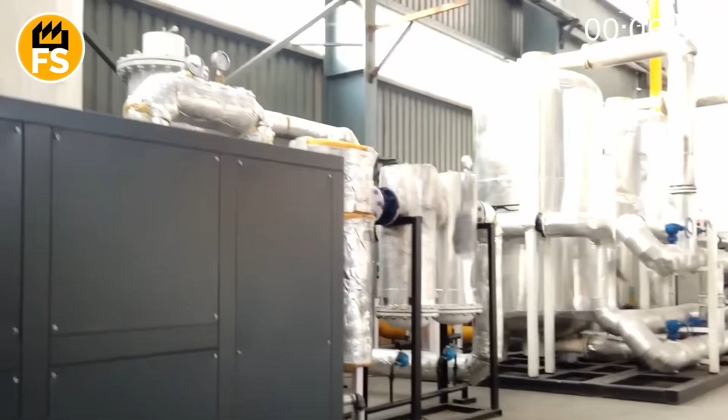This process repeats several times. Each cycle drops the temperature further. Eventually, nitrogen reaches its liquefaction point. This technique does not work with every gas, but it is perfect for nitrogen. Thanks to this, we can create liquid nitrogen from ordinary air.

Once the air is chilled and liquefied, it goes through fractional distillation. This process separates the liquid mixture into components based on their boiling points. Inside a special distillation column, the liquid air is gently reheated. Nitrogen has the lowest boiling point, around -320 degrees, so it evaporates first and rises to the top.

Oxygen boils at -297 degrees, so it evaporates later and does not climb as high. Argon, with a boiling point around -302, settles somewhere in between. The column forms a thermal gradient, colder at the top, warmer at the bottom. The gases evaporate and condense over and over, becoming purer with each cycle.

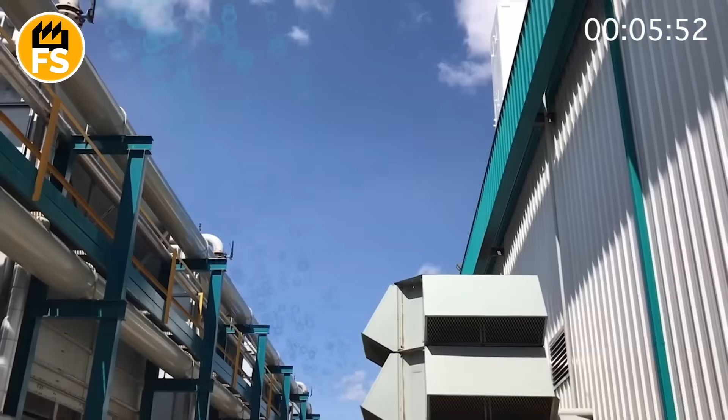It all works without additives, automatically, and with minimal losses, thanks to precisely managed pressure and temperature. Since nitrogen makes up roughly 78% of air, extracting it takes powerful equipment, a complex network of pipelines, and exact temperature control. Once separated, liquid nitrogen is stored in special vessels, cryostats, or Dewar flasks, which look like futuristic thermoses.

These vessels keep temperatures low and prevent evaporation. They are not just metal barrels. They have double walls with a vacuum in between to block heat. Some also include reflective coatings to minimize radiant heat loss. These containers can preserve liquid nitrogen for several days to several weeks, depending on volume, insulation, and how often they are opened.

Often, nitrogen is used right on site. For example, medical facilities use liquid nitrogen for cryopreservation of cells, embryos, vaccines, and tissues. In the food industry, it is used for flash freezing. Contact with liquid nitrogen instantly freezes food, locking in texture, taste, and shape.

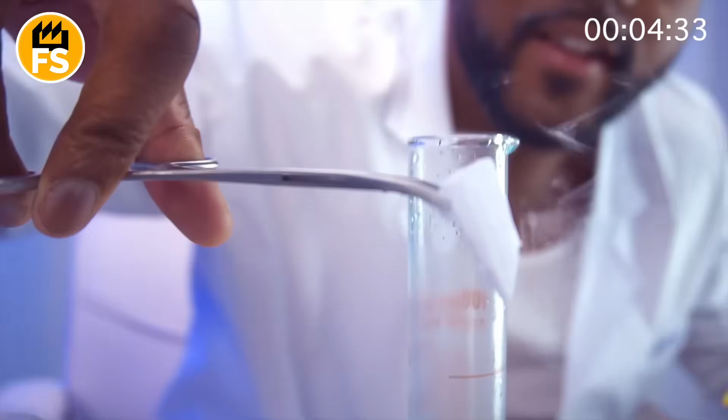But when it needs to be transported, preventing evaporation is critical. That is because nitrogen quickly turns back into a gas. Portable dewars, cryotanks, and cryotank trucks are used. Small dewars are handy for labs and clinics. Cryotanks are massive, like giant gas tankers, and are hauled by trucks with special mountings and ventilation. Cryotank trucks are purpose-built vehicles with insulation and pressure regulation to avoid explosions from expanding gas.

Sometimes, liquid nitrogen is produced directly on site, at large research centers or hospitals, to avoid reliance on deliveries.

How did humanity tame one of the coldest, most inert substances on Earth? It all began with nitrogen, discovered in the year 1772 by Scottish chemist Daniel Rutherford, who was studying air and found a gas that could not sustain fire or life. That was nitrogen, colorless, odorless, inert.

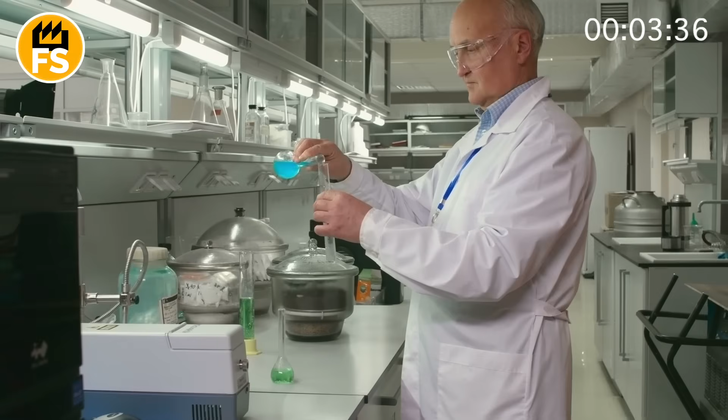But liquefying it required cold and pressure, and humanity needed more than 100 years to figure that out. The first liquid nitrogen was produced in 1883 by Polish scientists Zygmunt Wroblewski and Karol Olszewski. They built a system that cooled air so much that nitrogen, its main component, turned into a liquid. That was a breakthrough.

In the 20th century, cooling tech advanced fast. Scientists improved gas liquefaction methods and eventually developed the Joule-Thomson cycle, which relies on pressure drops to efficiently liquefy gases. In the 1930s and 50s, liquid nitrogen made its way into industry and medicine, starting in labs, then into surgeries, biobanking, and physics experiments needing ultra-low temperatures.

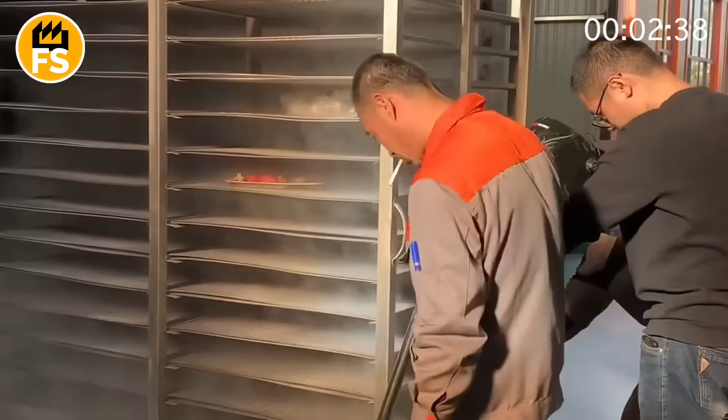Today, liquid nitrogen production is a global-scale operation. It is made in massive air separation plants around the world. What was once just background gas, making up almost 80% of air, has become a superstar of industrial science. Some chefs even make ice cream live.

Pouring cream into a bowl, adding liquid nitrogen, mixing, and voila, instant dessert. The cold is so intense, it freezes the treat in seconds.

Dip a banana in liquid nitrogen for a few seconds, and you can hammer nails with it. Seriously. Want to try? Inhaling cold nitrogen vapor can temporarily change your voice, like helium, but deeper. But do not try this. It is dangerous without protection and special equipment.

Some people have dipped old socks into dewars of liquid nitrogen. Result? The fabric becomes brittle like glass and crumbles in your hands. A perfect way to destroy evidence, if you are a sock.

Pour liquid nitrogen on a warm floor, and it turns into a dramatic cloud. It vaporizes instantly, making you feel like you are stepping through a Hollywood portal.

What should you never do with liquid nitrogen? Even if it looks cool, never stick your hand into it. Online videos show people dipping fingers and pulling them out unharmed. That is the Leidenfrost effect, a brief protective vapor layer forms around the skin, but if you hesitate for a second too long, hello frostbite. Do not try it. Seriously.

Never drink it. Yes, that happened too. In several restaurants, smoky desserts were served with a drop of liquid nitrogen. One careless guest sipped before it had fully evaporated and lost part of their stomach, literally. Afterward, several countries banned such stunts.